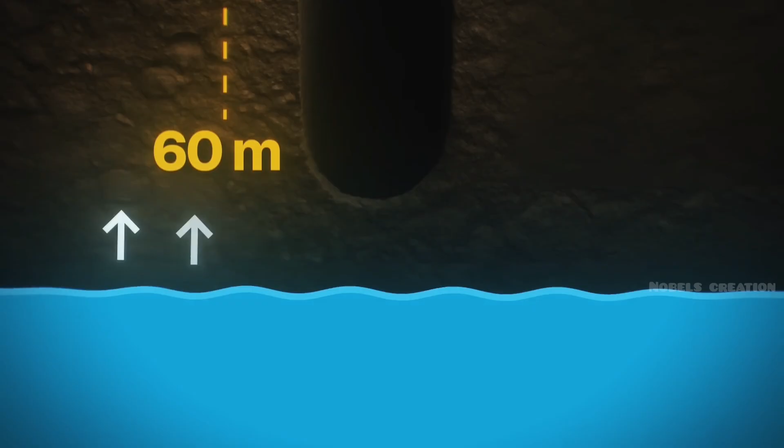But this task, which sounded simple at first, was extremely difficult to execute. Experts calculated that if the pool's depth was extended to 60 meters, the pressure from groundwater could easily push the entire structure upward. This is exactly like placing a filled water bottle into a pond. It floats on the surface because of buoyant force as the surrounding water pushes it upward from below. In the same way, the entire pool could potentially lift out of the ground at any moment.

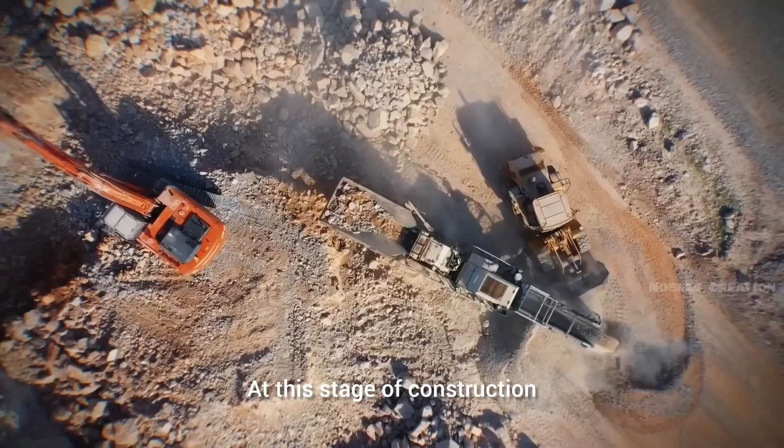At this stage of construction, Dubai's dream of building the world's deepest pool seemed like it was about to collapse. But then, one idea changed everything.

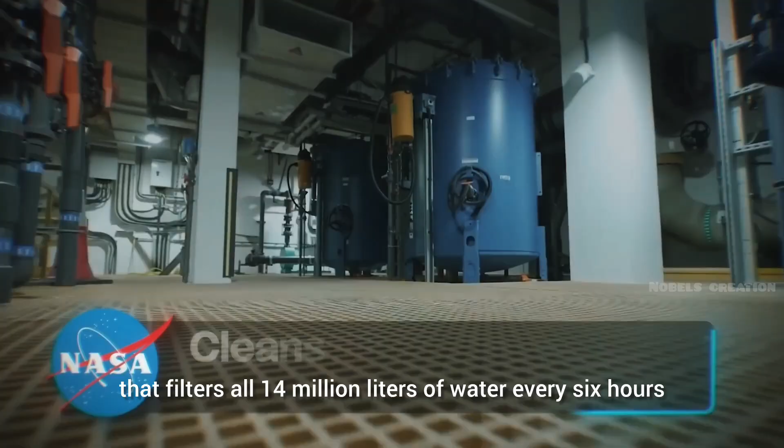To keep the pool water clean, with the help of NASA, a special system has been designed that filters all 14 million liters of water every 6 hours. Whether the outside temperature is 50 degrees Celsius or 20 degrees, the pool water is always maintained at 30 degrees for the comfort of divers.

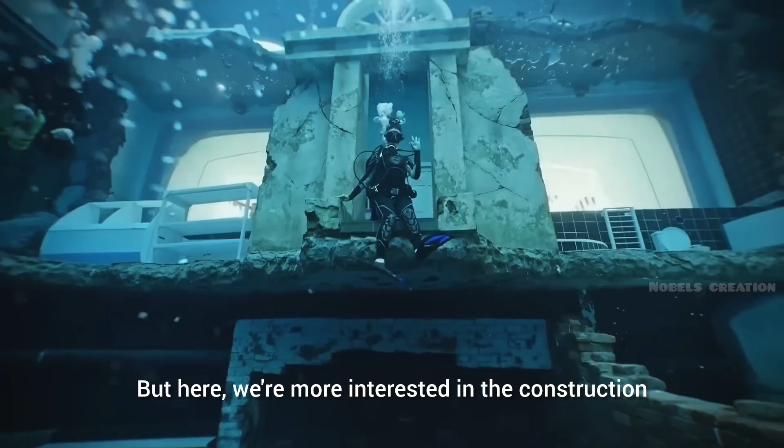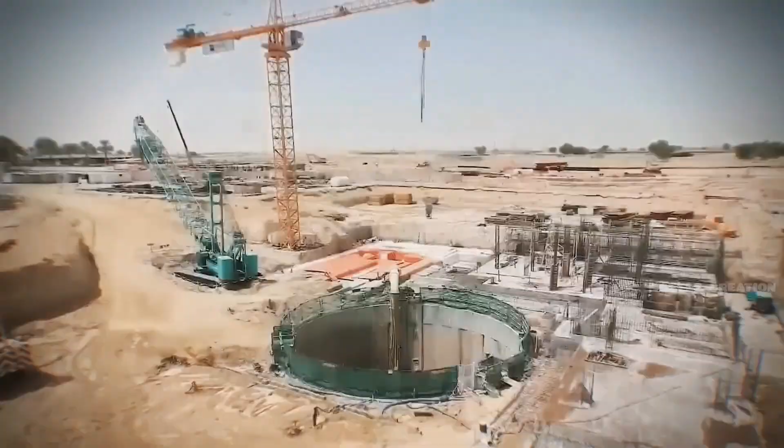But here, we're more interested in the construction techniques of Deep Dive Dubai, rather than its features. Because according to the engineering community, this deepest pool in Dubai is nothing short of an engineering miracle. What kinds of challenges did engineers face during the construction of Deep Dive Dubai? Without wasting any time, let's take a closer look.

The very first challenge was planning and design. Crown Prince Sheikh Hamdan wanted a design that could reflect the cultural values of Dubai. Before oil and tourism, pearl diving used to be a major profession in Dubai. Professional divers would jump into the open sea without any scuba gear, searching for seashells and extracting pearls from them to sell. At one time, a large portion of Dubai's economy depended on pearl diving.

Keeping this idea in mind, Deep Dive Dubai was designed in the shape of a seashell. A shell that, from a distance, looks like an open seashell lying on the seashore. But that was just the outer facade. Now, the real decision was how to build the world's deepest diving pool inside it. Architects and engineers from all over the world were invited to present realistic ideas for this project.

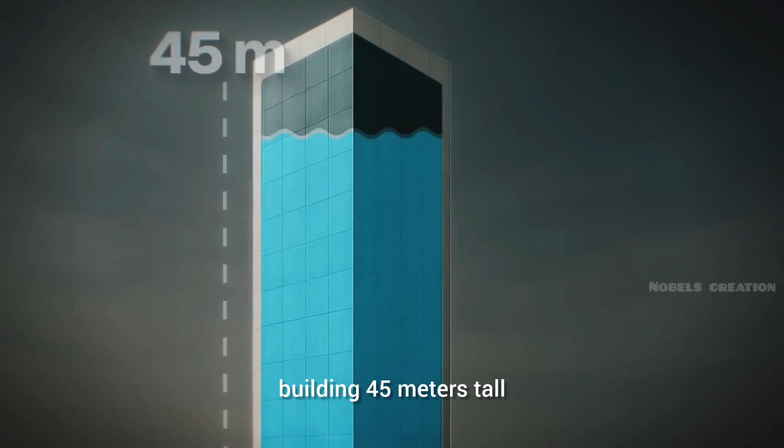The easiest approach was to construct a strong building 45 meters tall and fill it with water. But this idea had a major problem. Yes, the pool would be 45 meters deep, but to qualify for the world record, it had to be built underground, not above ground. Secondly, Dubai is an extremely hot city. If the pool was built above ground inside a structure, the external heat could affect the internal environment of the pool.

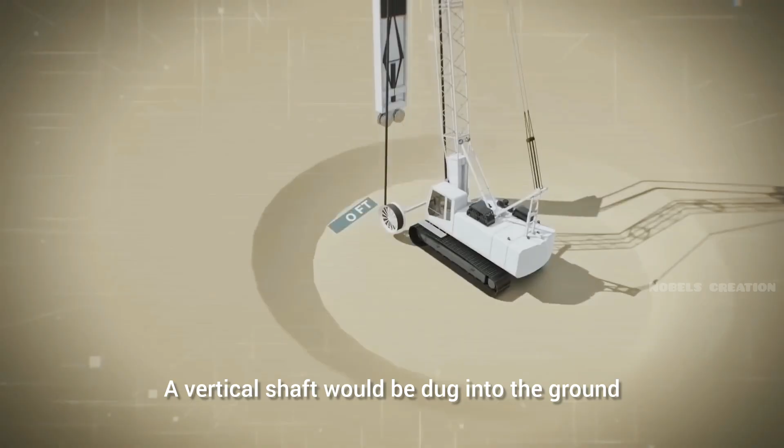Dubai's crown prince wanted a pool whose design and depth would both become a topic of discussion around the world. That's when the decision was made to excavate the world's deepest diving pool underground. A vertical shaft would be dug into the ground instead of a horizontal one. And from here began a completely new challenge: excavation.

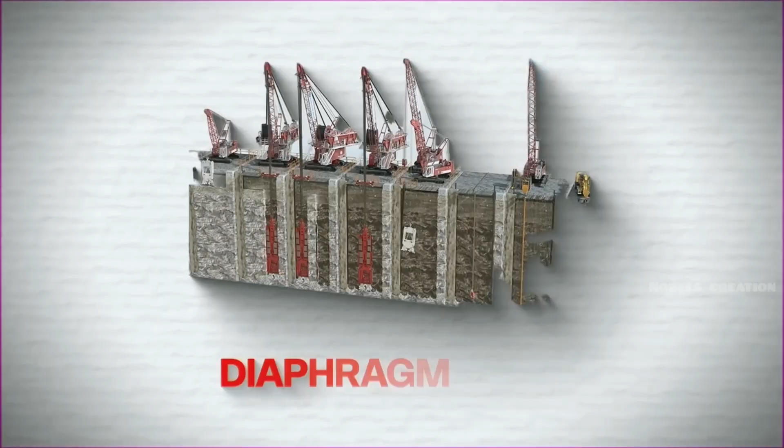The engineering team's challenge was to dig a shaft that would be 65 feet wide and 147 feet deep. This shaft not only had to be excavated, but also required a strong boundary wall to prevent it from collapsing. In engineering terms, this wall is called a diaphragm wall. To complete this task, a specialized excavator was brought in.

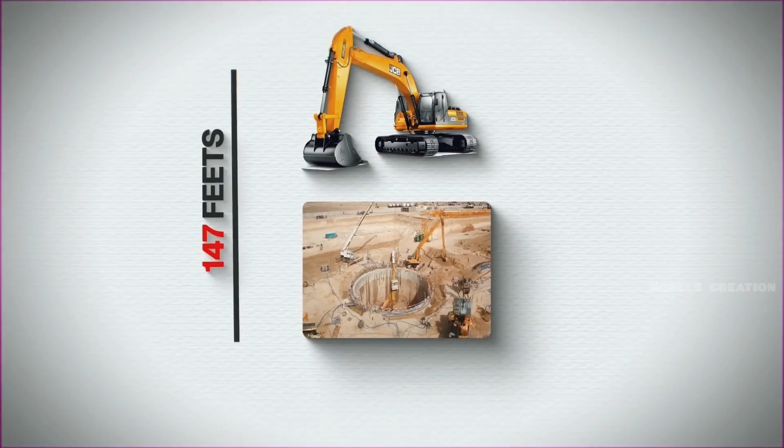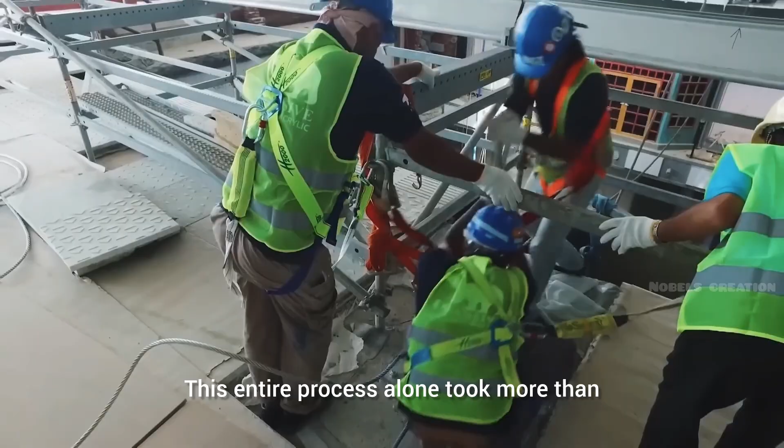With the help of this machine, a trench as wide as a pillar was dug down to a depth of 147 feet. Then, a steel cage was inserted into it and concrete was poured. Using this same method, the diaphragm wall was constructed in small sections all around. This entire process alone took more than 2 months to complete. After that, the actual excavation work began.

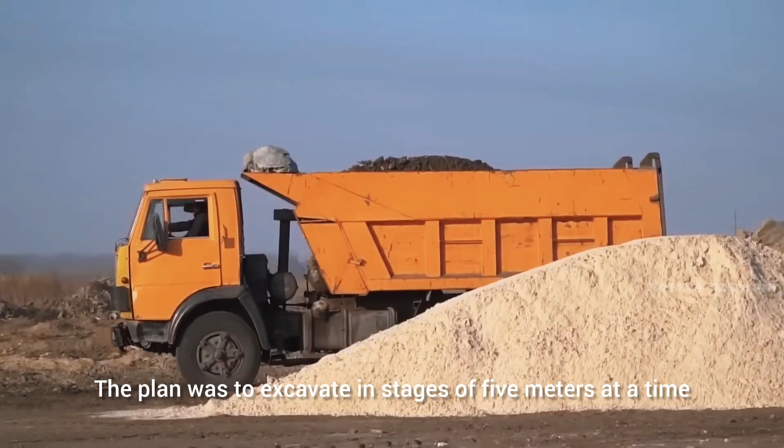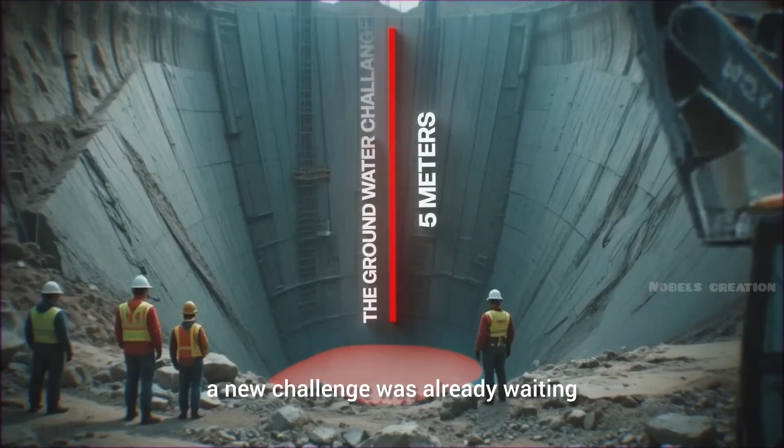The plan was to excavate in stages of 5 meters at a time, going all the way down to 45 meters, which was the depth of the diaphragm wall. But after excavating just the first 5 meters, a new challenge was already waiting: dealing with groundwater. After the diaphragm wall had been built and excavation began, groundwater started appearing at just 5 meters below the surface.

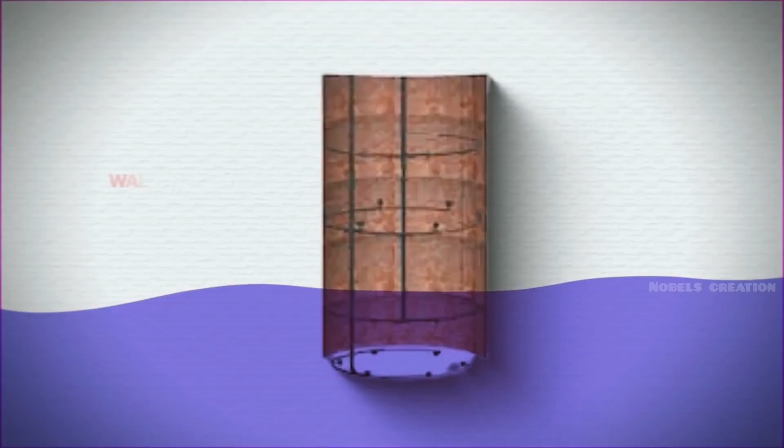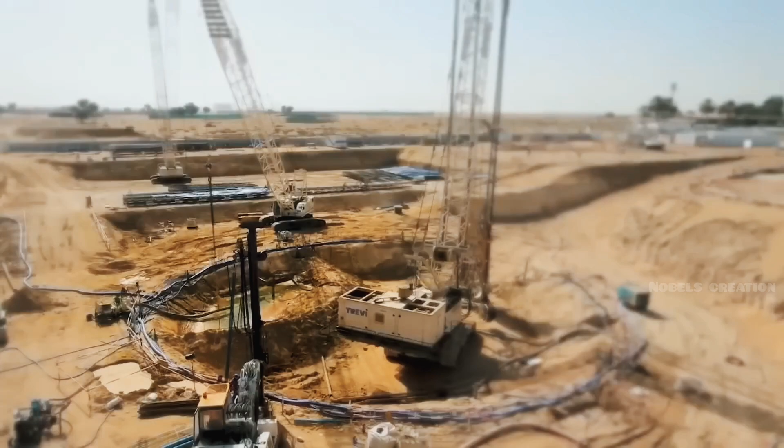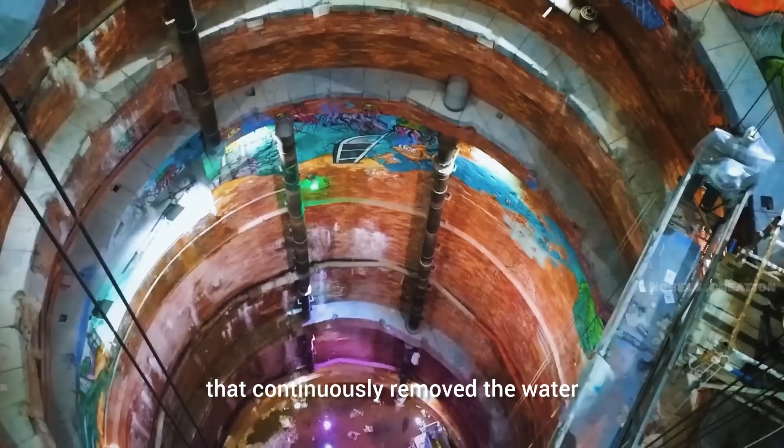Now, because the diaphragm wall had been constructed in separate sections, small gaps existed between them. Through these gaps, groundwater easily started flowing into the tunnel and began accumulating inside it. Without managing this groundwater, continuing the excavation was impossible. To deal with this issue, pumps were installed that continuously removed the water, while excavation work continued alongside it.

For the next 2 years, excavation continued, and throughout this entire time, the pumps kept running non-stop. For Deep Dive Dubai, a total of 45,000 tons of soil, sand, and rock debris was removed. After excavation was completed, when the pumps were turned off, water once again began filling the tunnel. In this situation, it became necessary to properly waterproof the diaphragm wall first.

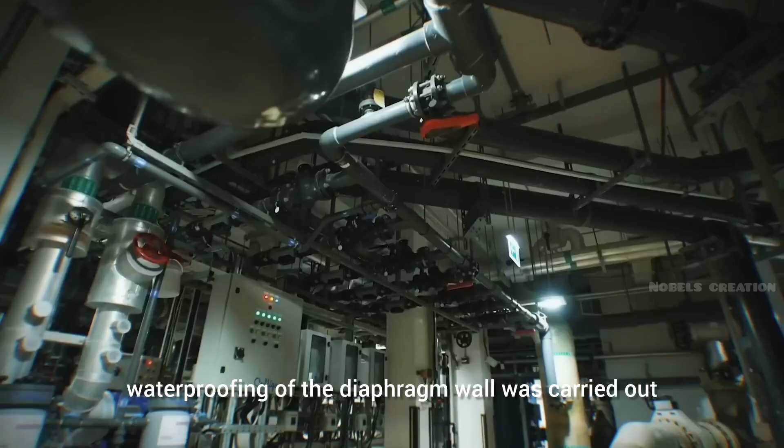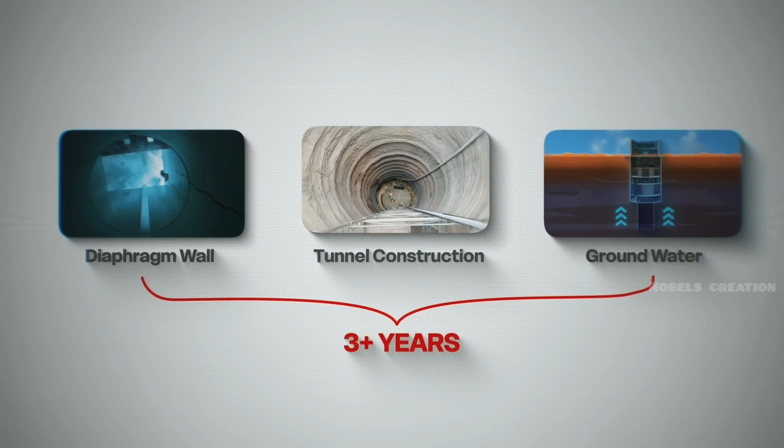Over the next several months, waterproofing of the diaphragm wall was carried out. Only after that were the water pumps finally turned off. The diaphragm wall construction, excavation, and groundwater waterproofing together took more than 3 years to complete. By now, the engineering team was already significantly behind schedule. Every single day had become extremely valuable.

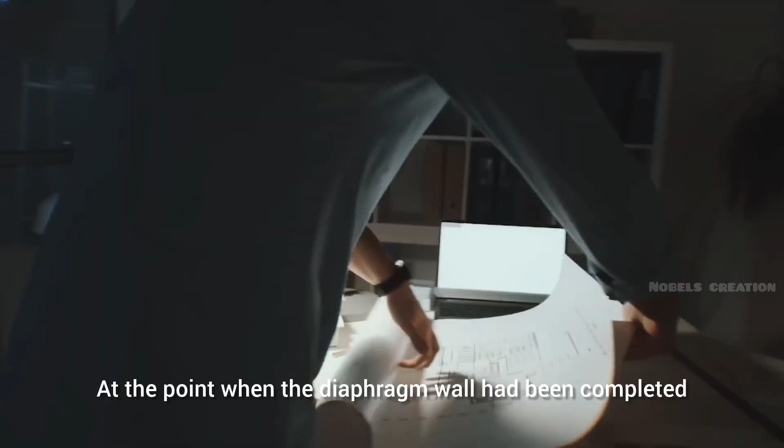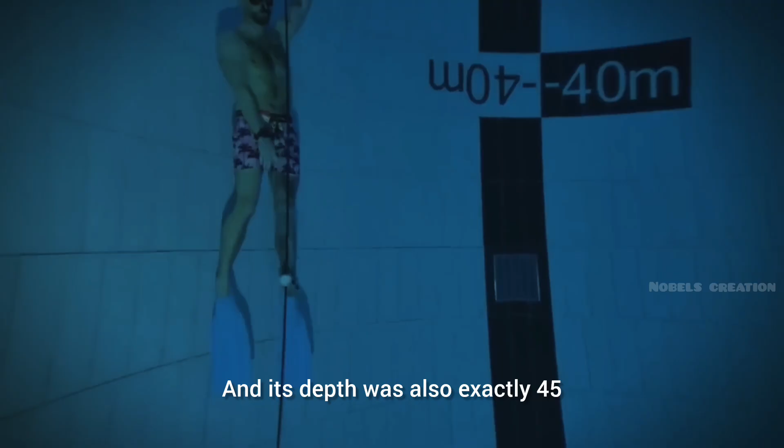But during this time, a new problem suddenly arose in the construction process of Deep Dive Dubai: a design change. At the point when the diaphragm wall had been completed, excavation was done, and groundwater had been managed, right at that moment, news arrived that near Warsaw, the capital of Poland, a deep diving pool called Deep Spot had already opened. And its depth was also exactly 45 meters, or 147 feet.

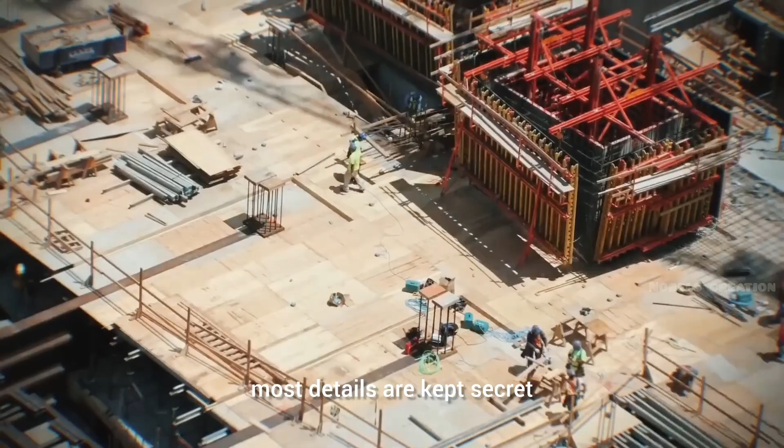This news hit the entire project team like a bolt of lightning, because all the effort they had put in so far was aimed at achieving a world record. Normally, in projects like these, most details are kept secret, and something similar happened in this case as well. When Dubai's crown prince, Hamdan bin Mohammed Al Maktoum, found out about this, he requested that the depth of Deep Dive Dubai be increased further so the world record could still be secured.

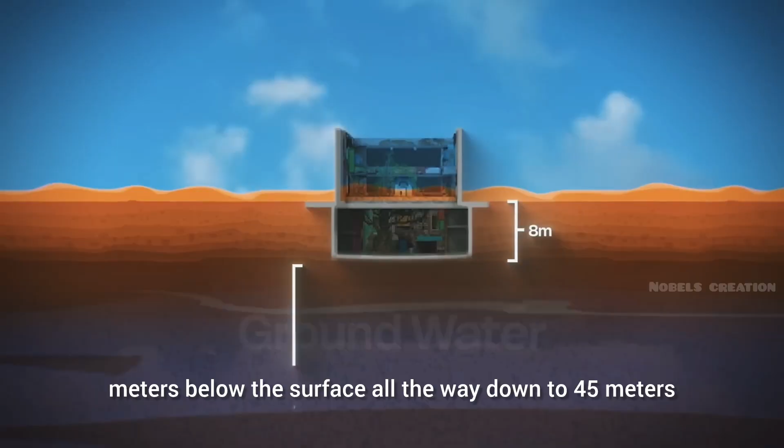But here, there was a serious problem, because groundwater was present from just 8 meters below the surface all the way down to 45 meters. This meant that groundwater would push upward against the entire pool from below. This force is known as buoyant force. Engineers had already calculated this force and planned to counter it using the weight of the water inside the pool. And those calculations were based on a depth of 45 meters.

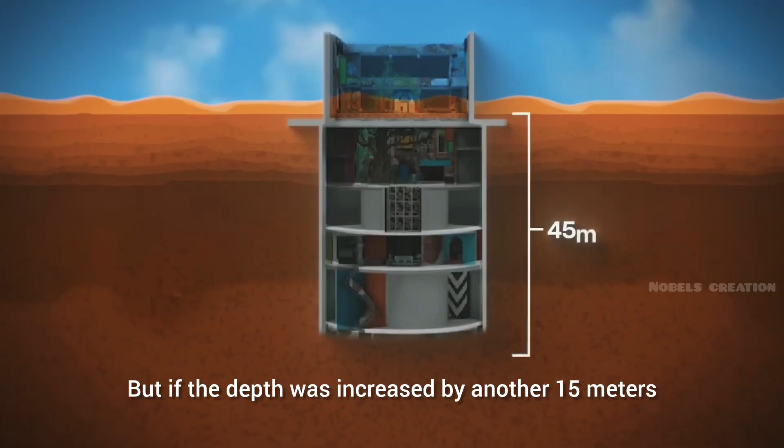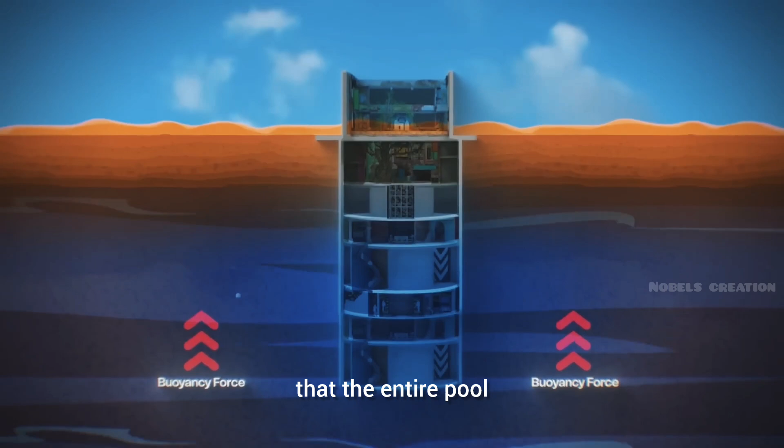But if the depth was increased by another 15 meters, then obviously the buoyant force would also increase significantly. And it was entirely possible that the entire pool, along with the diaphragm wall, could rise out of the ground. Because of this issue, the entire construction work came to a halt. Finding a solution to this problem as quickly as possible had become absolutely critical. After extensive research, a solution was finally found.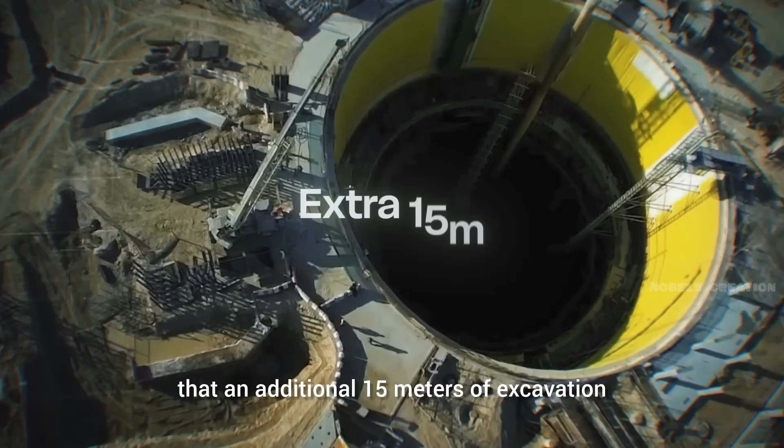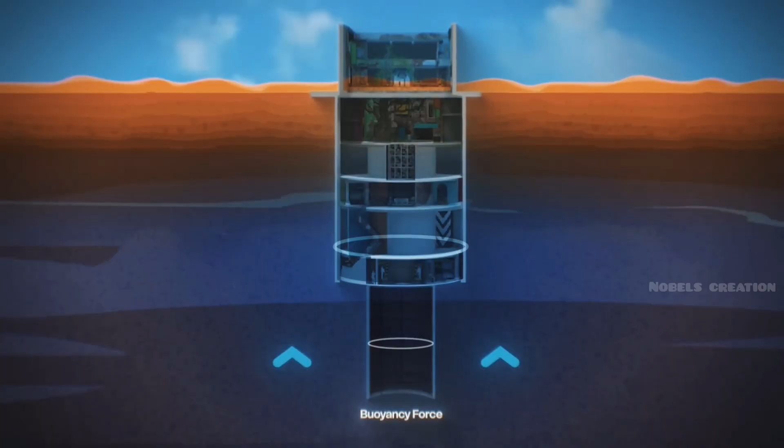First, it was decided that an additional 15 meters of excavation would be carried out in the tunnel. But the diameter of these extra 15 meters would be nearly half of the diameter of the original 45-meter section. This would reduce the area affected by the buoyant force. And secondly, an under-reamed base would be constructed beneath the tunnel. An under-reamed base is a technique in which an anchor-like structure is embedded deep into the ground beneath the foundation.

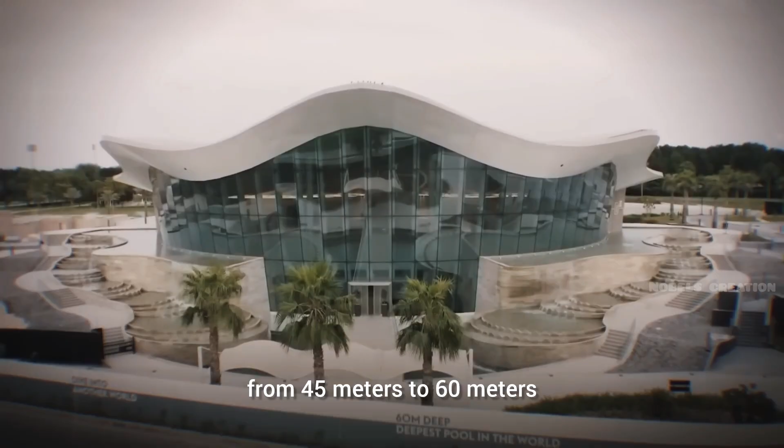Just like an anchor holds an entire ship in place, this under-reaming would hold the entire structure firmly to the ground. Using this method, the depth of Deep Dive Dubai was extended from 45 meters to 60 meters, and once again, the project became eligible for the Guinness World Record. But the problems were still not over.

As time continued to pass, keeping a 60-meter deep tunnel empty without water became extremely dangerous, because canceling out the buoyant force was only possible with the water inside the pool. If it was left empty for too long, the entire structure could rise due to groundwater pressure. Now it was time to fill the pool with 14 million liters of water. But the problem was that Dubai's water supply authority could only provide a limited amount of water. At that rate, it would take nearly 3 months to fill the entire pool.

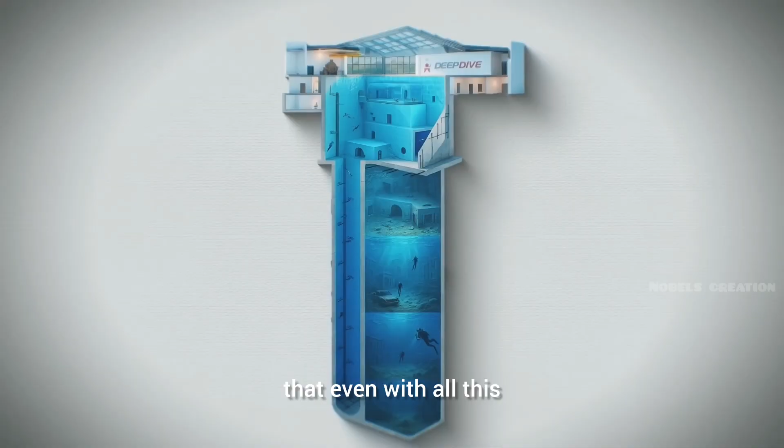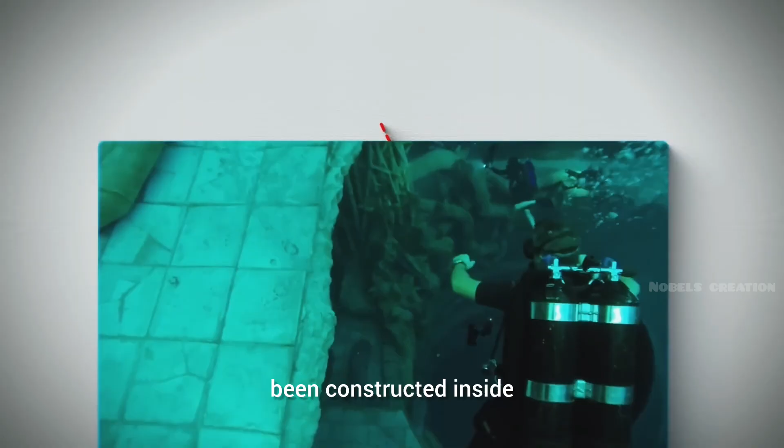To meet the deadline and speed up the process, along with the Dubai Water Authority supply, more than 100 water tankers were brought in. You can estimate the massive scale of Deep Dive Dubai from the fact that even with all this, it still took 1 full month to fill the pool. Here, it's important to mention that before filling it with water, the entire sunken city theme had already been constructed inside. Only after that was the water added.

Even after filling the pool, many new challenges appeared. For example, some materials started to rust, and some objects began to float after the water was added. To fix this, holes were drilled into those items, and extra weight was added so they would stay submerged.

After completing all the finishing work, Deep Dive Dubai was first opened to special guests in 2021, and then it was opened to the general public in 2022. The total cost of Deep Dive Dubai has still been kept secret by the Dubai government, because in their view, this is a priceless project. So, what do you think about this incredible project?